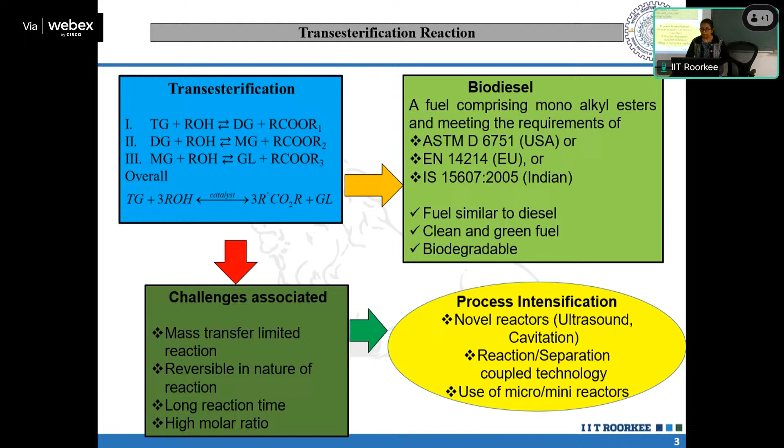But the point is, when you try to carry out this reaction in a batch reactor, you face certain limitations. We use some catalyst for it also. Let us discuss why we are not particularly interested in carrying it out specifically in a batch reactor - basically there is a mass transfer associated with the reaction.

The alcohol molecules need to diffuse through, and then the reaction starts. If you mix alcohol and triglyceride, that is the oils, they are not miscible. If you take this mixture in a batch reactor, or any reactor, and keep it aside, you can see two layers. The reaction only happens at the interface, and the molecules need to diffuse to the interface, so the resistance of diffusion is very much high in such cases - there is a mass transfer limitation.

Chemical engineers can correlate when mass transfer is associated with a reaction - we call it mass transfer limitation because mass transfer now governs and dominates the entire situation, being the slowest phase. Also, the reaction itself is reversible - the products are also forming and reacting back to the reactants, so that is another challenge.

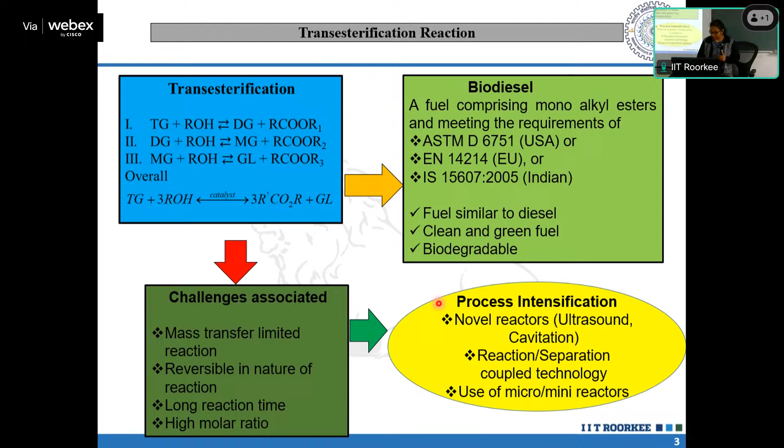Okay, so that is why we more focused on this one. This is already being discussed. So what are the typical parameters in such cases of production you can think of?

So depending on, what are my challenges? My challenge is first to take care about the mass transfer, then about the high reaction time, which is the result of the slowest mass transfer step, and of course the purification.

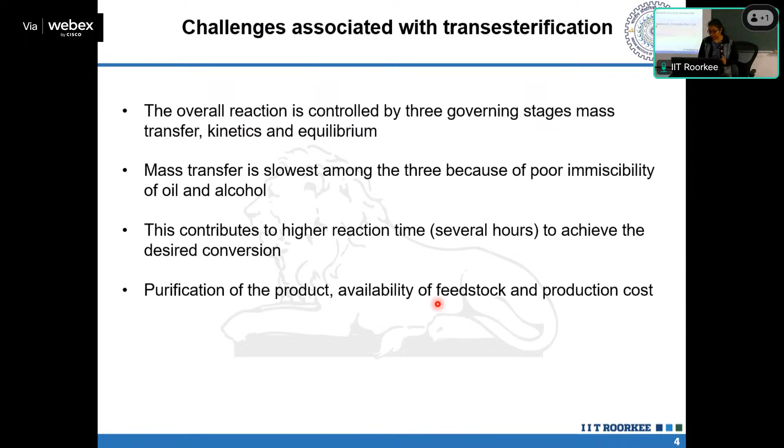So what modification for input parameters in a microreactor can we think of? It may be the design of the microreactor itself, and as we have discussed in the last several classes, the injection type matters in such small reactors for the distribution. So the injector type itself, and of course the flow distribution.

What is the type of flow distribution? We will discuss more in this class how the flow distribution matters. Also the molar ratio for reaction, and temperature.

This reaction happens at a particular temperature of 55 to 65 degrees centigrade, around that, below the boiling point of methanol. And of course catalyst concentration, that is another parameter because it is a catalytic reaction.

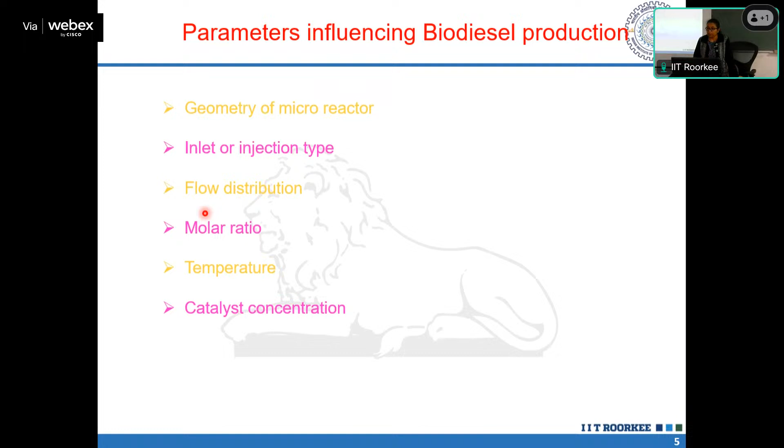So these are the parameters we have studied more or less. Of course we have not studied temperature variation; we have taken almost a constant temperature, which is reported mostly in literature. Other parameters in some way or other we have discussed.

Last class Professor Angeli pointed out that the process itself in the reactor in such miniature channels is often a laminar flow. Isn't it? She mentioned it's a laminar flow, so it is very easy to model because no turbulence modeling is involved.

That is very true. So you have lowered the scale, the diffusional resistance has gone, but you have laminar flow. So the transport process is now governed by diffusion, molecular diffusion itself. It's a low Reynolds number process, so the mass transfer is governed by molecular transport.

So there is scope for improvement of the transfer rate in such reactors, and how you can improve the transfer rate further, that is where your innovation lies. Generally three methods are reported.

You can try something else also. So what is the idea? The idea is how to create a local turbulence in your channel, in your reactor, so that further enhancement of the transfer rate can be achieved.

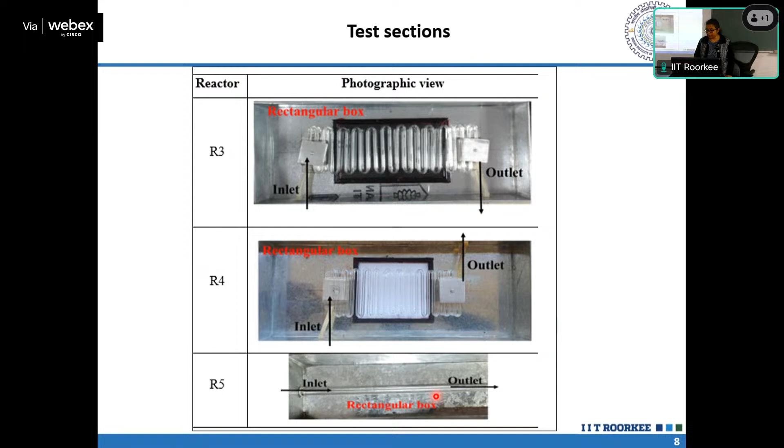Then we changed the number of turns, and we made two other setups. For comparison, we took a straight tube of the same inner diameter and same length, with no turns. These are the final comparisons - we gradually reduced the R by D ratio, and compared with the straight one at R5.

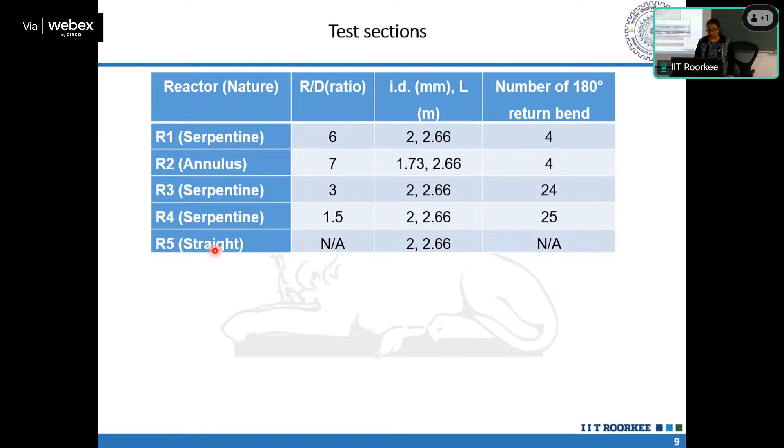Before going to the reaction, let us first understand the hydrodynamics, because it is the hydrodynamics that determines where the reaction will take place, and at what location. It happens at the surface of the slugs, where the two phases are in contact - only there could the reaction take place.

So their distribution matters a lot, and the other thing that matters is how long the phases are in contact, which is given by the residence time. So two things matter: one is the distribution, which indirectly specifies the specific area of contact.

It is the distribution, so you could figure out the specific area of contact for this type of thing, and specific area of contact for this type of dispersed droplets - all of these, and so is the residence time.

So how are we getting this distribution? By just modifying the mass flow rate or volumetric flow rate. We are giving the input of volumetric flow rate, and that can be correlated with the molar flow rate.

Of course, knowing the molecular weight and density, you can calculate the molar flow rate. Once you know this, you can actually influence the molar flow rate, influencing the specific area of contact, and also influencing the residence time.

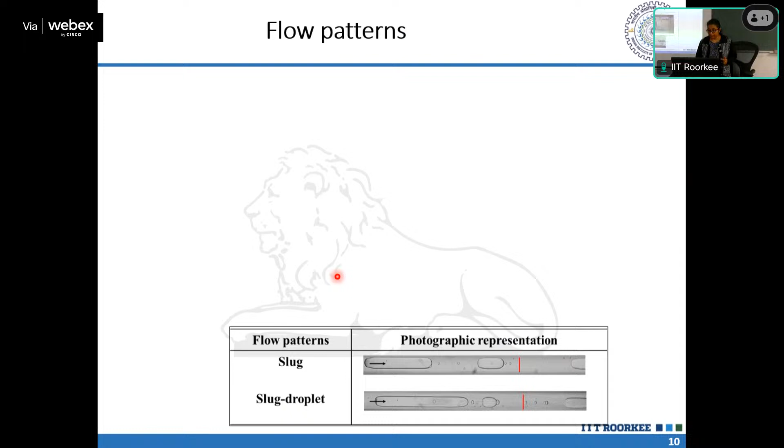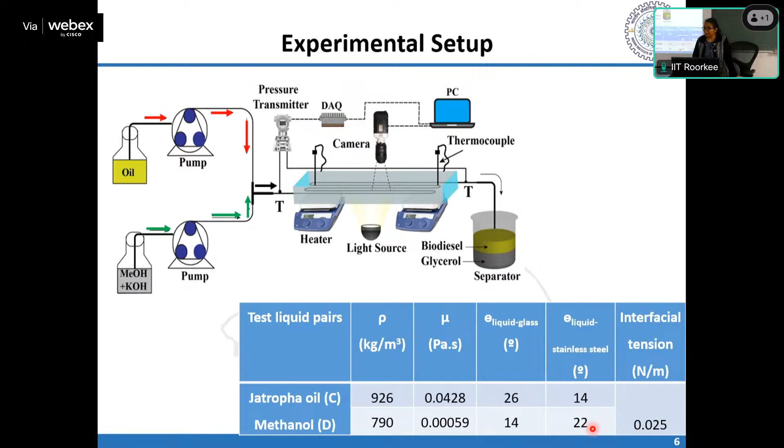they are having a low contact angle. So what they try to do when they have something like this, the drops try to stick on this particular stainless steel, and when they are closer, you can see a large slug is actually being almost stuck at that particular surface. And gradually two phenomena can happen.

If the slug is of smaller size and it is being stuck, sometimes with the increase in flow rate of the dispersed phase, it is joined by some other drops or slug, forming a further long structure. That is increase of inertia for the dispersed phase.

If instead I increase the inertia for the continuous phase, what will happen? The interfacial shear acting on the dispersed phase is increased, and you may observe detachment of droplets, daughter drop from the slug. So these two phenomena may happen, which gives rise to two different regimes in this particular annular structure. One is slug droplet, second is droplet dispersed.

There are more uniform types of structure that we can see from this. This happens when you have something inserted in this. Till now we don't know whether it's going to improve the reaction yield or not. So this is, and this is the straight one, given just for comparison.

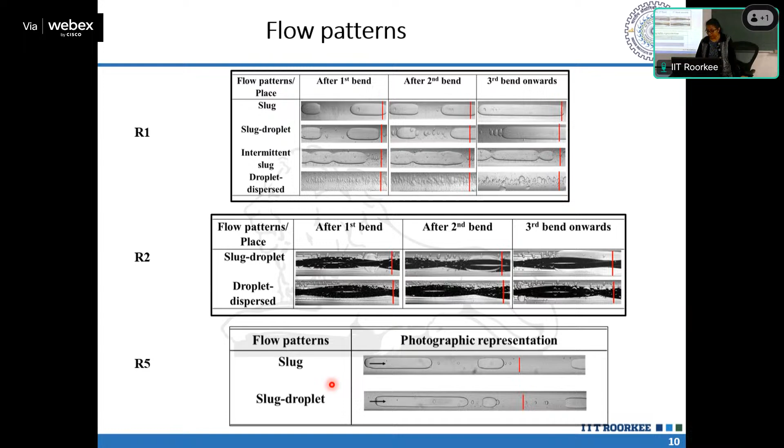We have again, no droplet-dispersed is being mentioned. We have noted only slug and slug droplet. Similarly, this is for R3 and R4. So what is new? This one, this observed flow pattern.

This is observed for R4. What is R4? R4 is the test section where you have very less R by D ratio. So what happened when the R by D ratio is lesser?

They're closely packed. Then there is a sudden change in direction of the flow, and at the downstream, let's say first after the bend—you can see this is the first bend, and this is after the second bend. So after the change in direction happens at the first bend or the second bend, there is a tendency for the slugs to join.

Also some continuous phase is being involved, because the dispersed phase is made of methanol and it has very low viscosity. So the continuous phase drops invade this particular long structure. They go inside, and you could see there are small drops of continuous phase observed inside this long, slightly distorted structure.

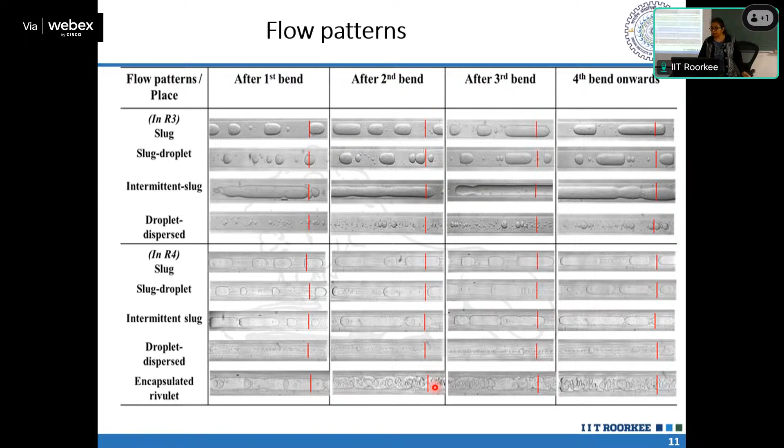Now let us see the effect of all these things on the flow regime map. For the flow regime map, since we have taken different R by D and different structures of geometry, we have tried to put it out in terms of non-dimensionalized numbers. One is Weber and second is Ohnesorge. So it's a product of these that we are giving, so all the forces are taken care of.

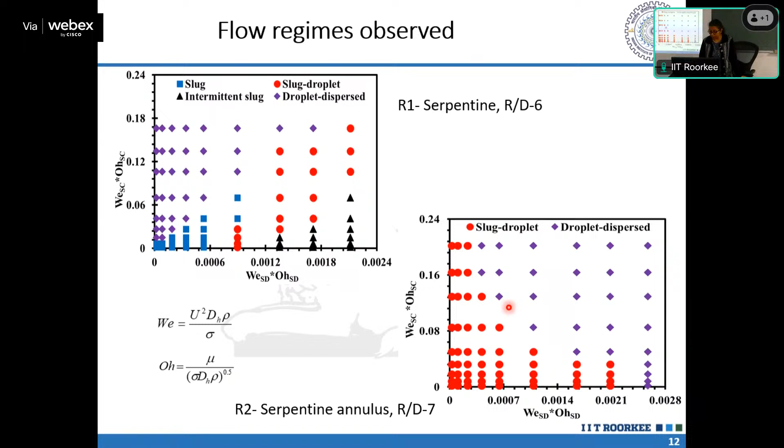So this is more or less what we have discussed. Only two flow regimes observed for R2, while four observed in R1. This is the case where we have the annulus. Then some comparisons are given here.

As I have already mentioned, in this particular geometry, the methanol drops spread and try to stay on the surface of the steel wire. That results in, if you increase one phase's inertia, it could result in forming a long structure. If you increase the inertia of the continuous phase, it may result in formation of droplets. That is the main difference here.

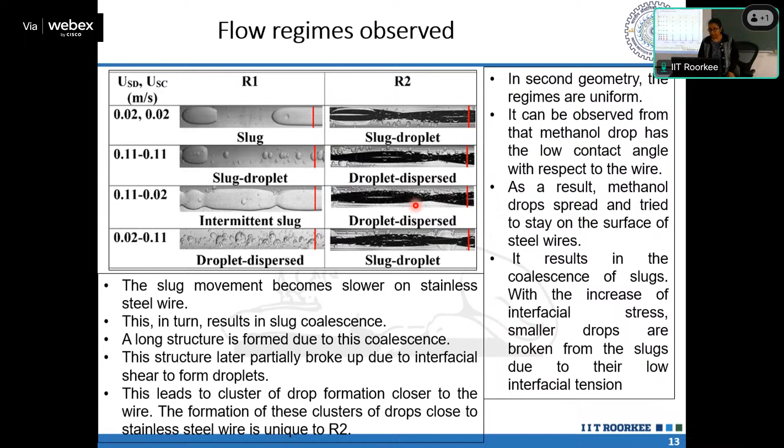And this is also what we have discussed, the formation of this kind of rivulet structure and encapsulation. So this is another observation, which is—we now have 5 flow patterns in case of the R by D 1.5.

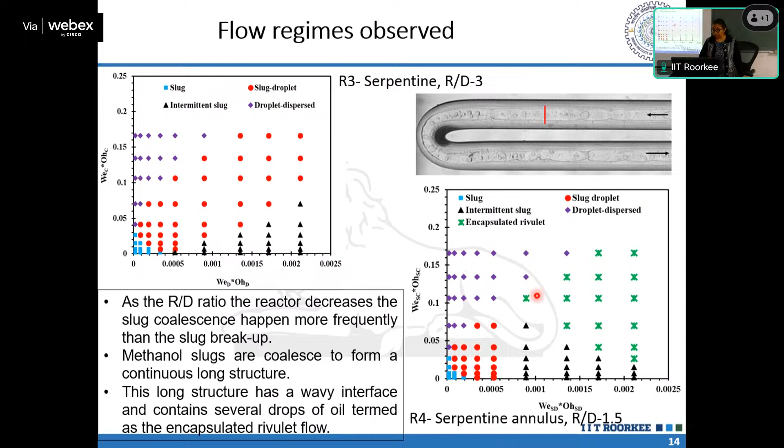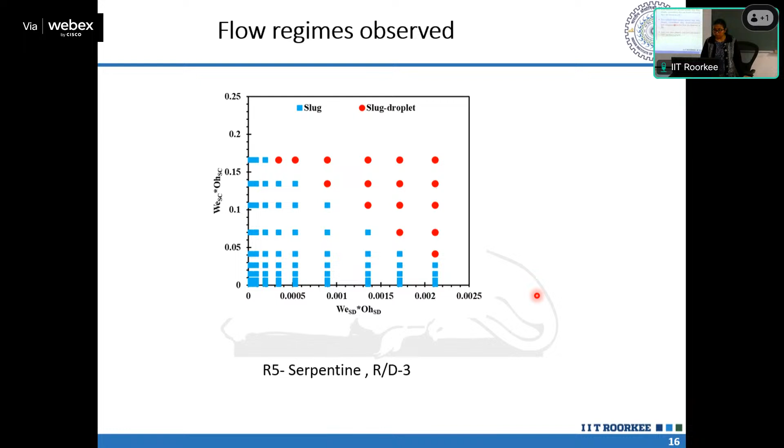So what is their effect in this case? Let us move to the reaction quickly now.

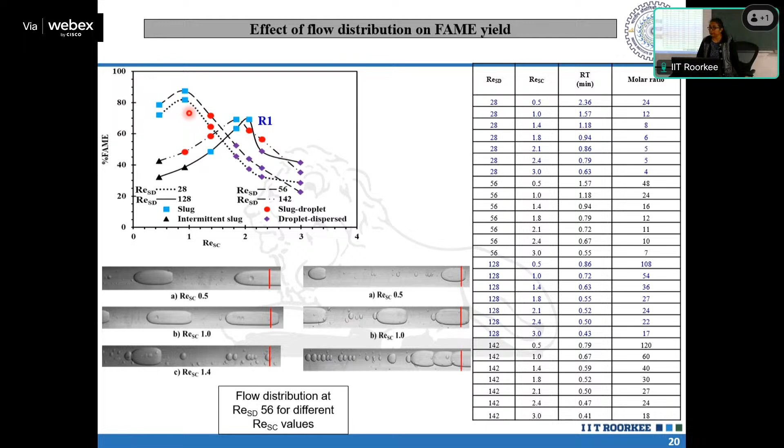So that indicates the existence of an optimum situation in terms of both the residence time and the specific surface area of contact. Both need to be optimized to get maximum yield. This trend is true for all cases.

Now, we inserted a weaving stainless steel wire inside the serpentine structure, assuming that further reduction in area might in some cases increase the yield, but the reverse happens. When we inserted the wire, the maximum yield obtained in reactor 2 is basically less than reactor 1.

This happened because there is a tendency for the methanol to sit on the stainless steel wire, forming a long structure. When this structure forms, the specific surface area is again disturbed, which is why the maximum yield in R2 is reduced.

Then, in comparison with a single straight serpentine channel without any insertion, the maximum yield among all these 5 reactors was observed in R3, close to around 97 or 98%.

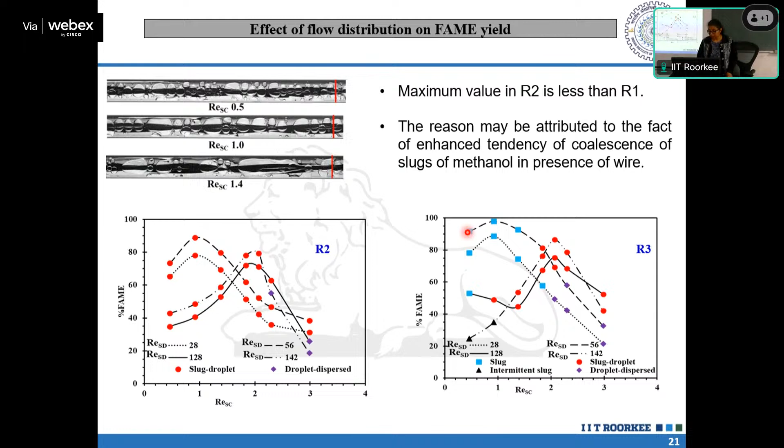R4 also has a similar yield, while R5's yield is pretty low. If we take a straight reactor, the yield is not even 80%, whereas we get close to 97-98% yield in a serpentine reactor.

I'd like to mention that we have also tested this reaction in a batch reactor. For a similar yield in a straight reactor, the batch reactor takes around 2 hours, whereas this happens in almost 20 minutes, taking all the separation into account. That is the advantage of small channel reactors, which can be further modified through changes in direction, making it serpentine.

But again, what is the deduction till now? What is the R by D ratio you can take, and why is there an increase in yield for R3 or R4?

More mixing occurs due to flow reversal. In single phase flow passing through a serpentine channel, a flow reversal is observed. If the primary direction of flow is this way, at the bend in the microchannel, due to centrifugal forces, a secondary flow occurs in the reverse direction. So at bends, it is almost a counter-current operation - the primary phase flows this way while the secondary, heavier phase flows this way.

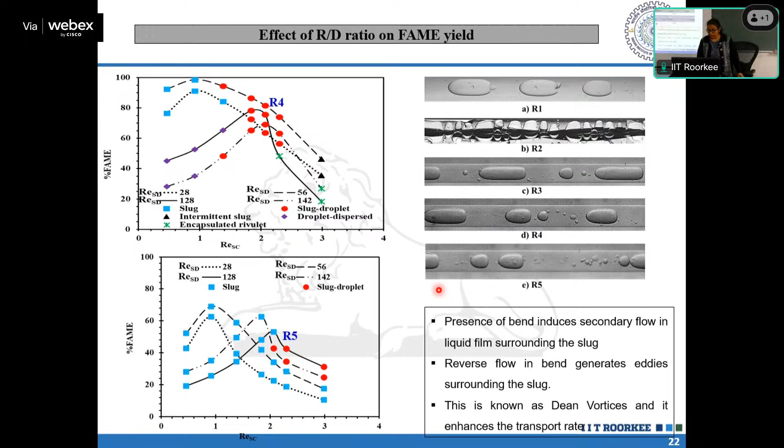So what type of reactor to select? We have another parameter coming into the picture, that is related to energy. What is the pumping power you can use?

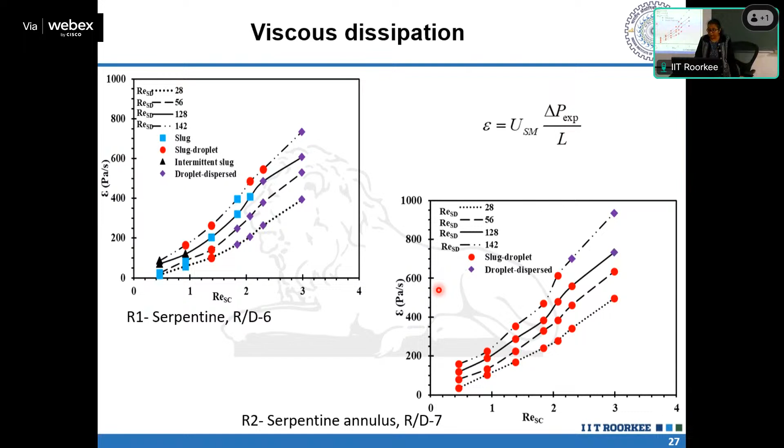So for that, we have estimated viscous dissipation - how much viscous dissipation is noted for each of the cases. What we observed is that the higher your R by D ratio, the higher the viscous dissipation.

So taking into consideration this viscous dissipation, we have selected R3 as the optimized condition, because R4 has two disadvantages. One is the tendency to form an encapsulated rivulet structure, which is not very good for having a specific area of contact for the reaction. And more interface means more pressure to expect.

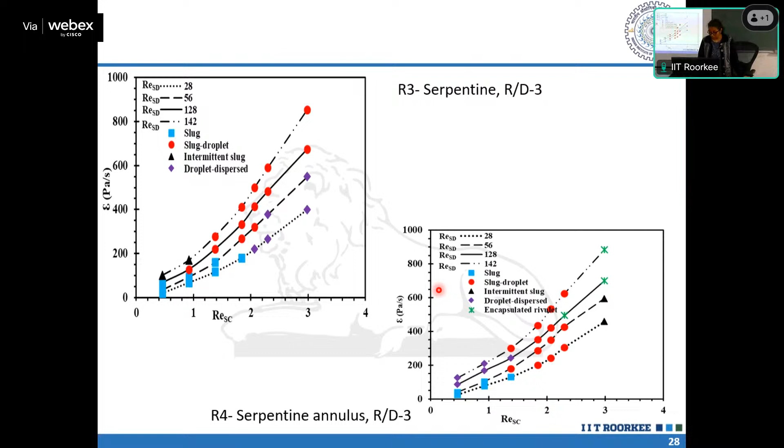So the pressure is also high because the R by D ratio is going lower. The pressure is also higher for R4, and that is why the optimum R by D that we have selected is 3. So that is how we have taken care of this optimization design of the reactor.

So these are some observations - the viscous dissipation is higher in R2 because of this insert and its diameter getting reduced, followed by R4, R3, R1, and then R5, which is the straight one.

So viscous dissipation is almost 1.5 times higher if you place the wire. This increases the viscous dissipation, and among these, R4 has the higher value. So for all these conditions, this particular optimum condition has been chosen.

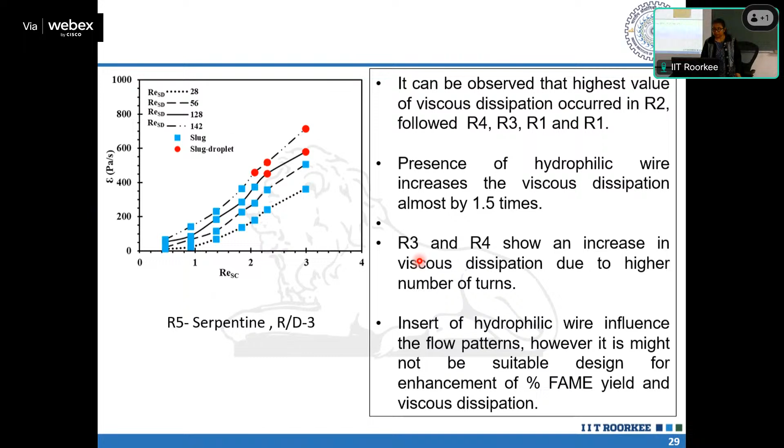Now, if I have some time, quickly I would like to mention that we have done two more parametric variations. One is the catalyst variation - of course, we need to do the optimization of catalyst.

Here we have used 2% of catalyst. We carried this out without any catalyst, starting from 2.5 percentage of catalyst, and then we have optimized it, just as we optimized the length.

So we took reactor 1, then gradually added single units of turns, and increased the length, and came to the conclusion of the optimized length. After this optimization was done on reactor 1, only then did we take further optimization through insertion of the wire and modification of the R by D ratio.

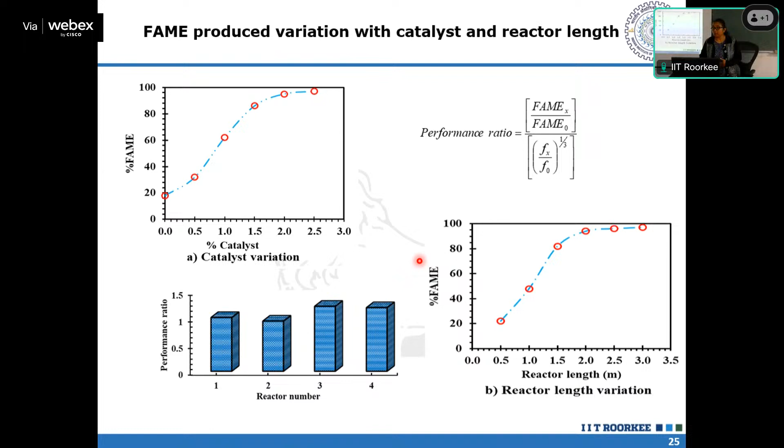So the idea you need to understand is that you may take any innovative measure to obtain an increase in either mass transfer efficiency or yield. But the idea is you have to check all the conditions, in the sense that you need to check whether you are increasing the energy consumption abruptly or not - that we will discuss in the next topic also, how to take care of that.

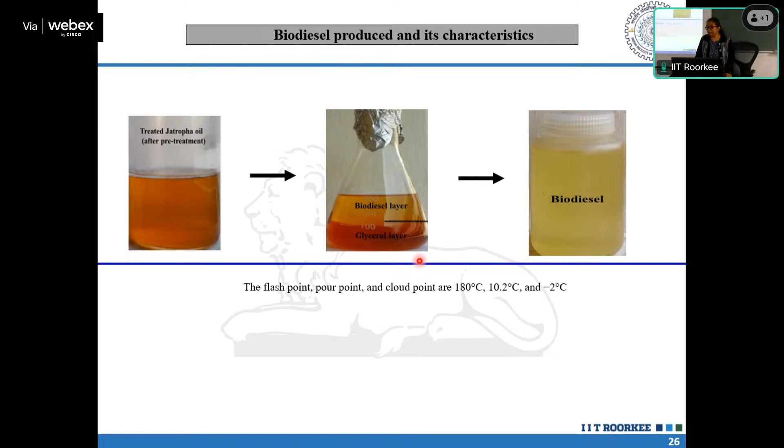I may reduce the diameter from 2 mm to 1 mm to 0.5 mm, but is it worthy? How much increase in efficiency or yield am I getting by spending so much energy? So that is one aspect - the viscous dissipation or energy consumption also needs to be taken care of while you are designing. Okay, with this...